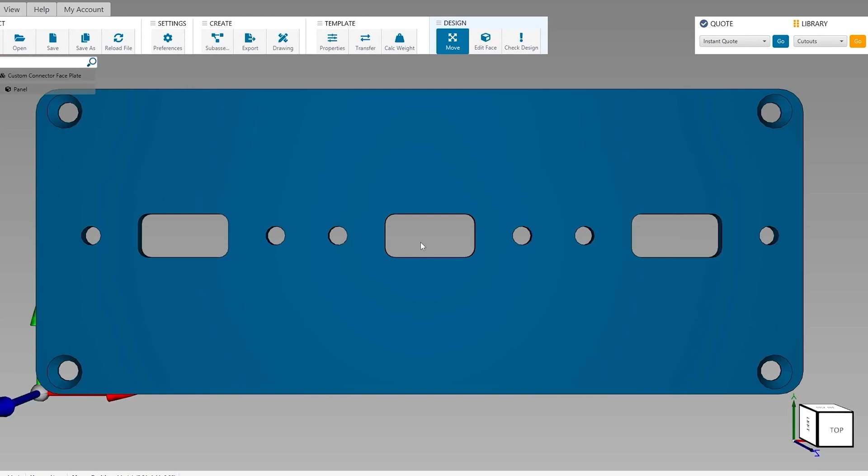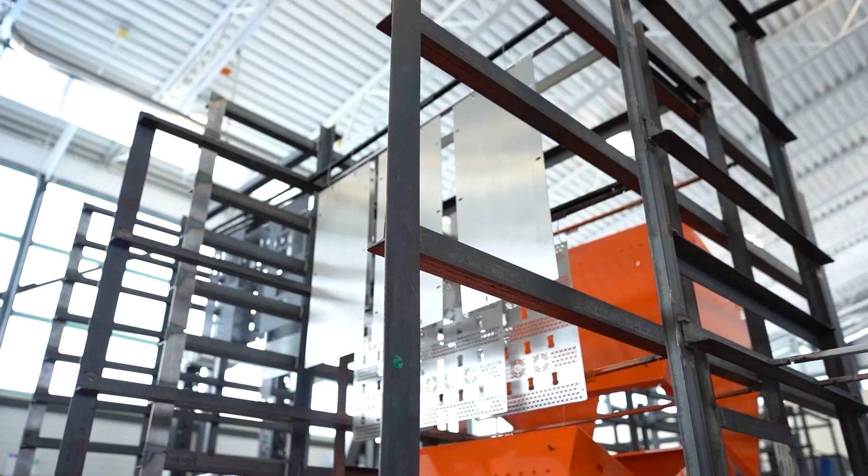That's why we've created professional design software that's directly integrated with our fast custom manufacturing. Protocase Designer is a simple but powerful CAD design software that's seamlessly integrated with our revolutionary mass custom manufacturing process, eliminating design latencies and making sure that we still build your custom parts and enclosures in a lightning fast 2 to 3 days.

Now with Protocase Designer Enterprise, we've taken all of the things that you love about Protocase Designer and added in some exclusive features. One of those features being the ability to create dimension drawings directly inside the software.

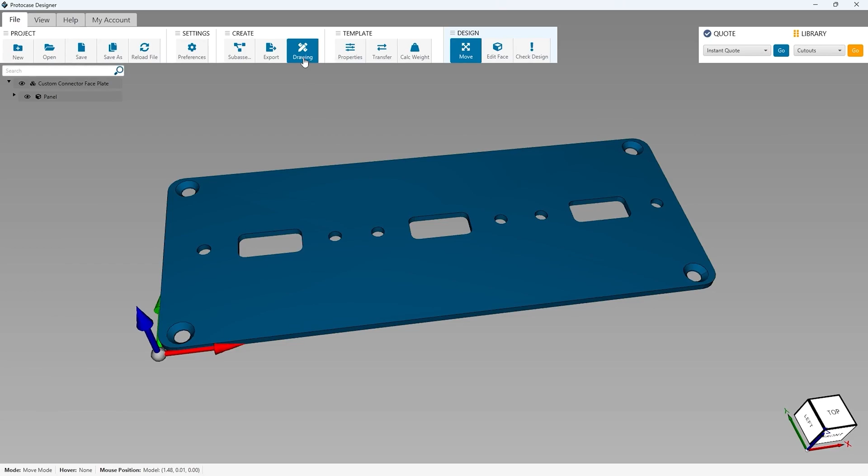Our all-new Dimension Drawings feature was heavily requested by not only our customers, but our own internal engineering and design services team. This feature allows you to verify your models with precise accuracy—keyword being precise.

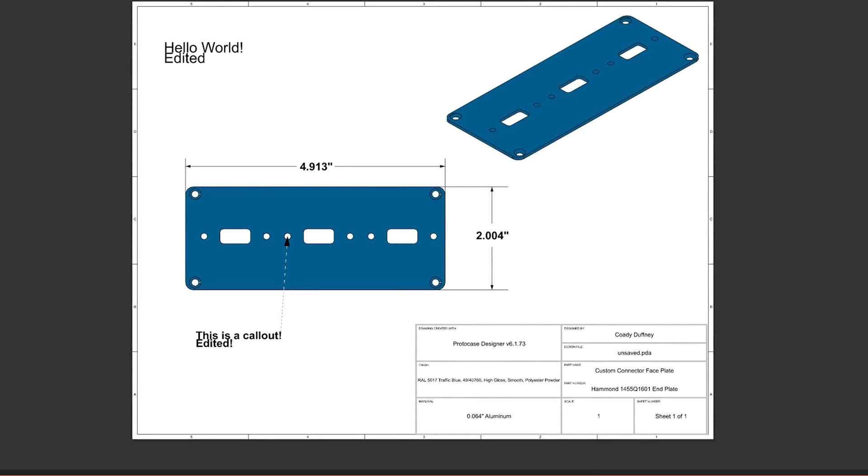These drawings provide information about the size, shape, and features of the design, such as lengths, widths, diameters, angles, tolerances, and more. You can even add editable text notes to meet your organization's specific requirements and create fully dimensioned PDF drawings of your design. Now it's all about working smarter while still meeting those critical design deadlines.

So let's take a look at this feature by first opening Protocase Designer. To get started, I'm just going to open up a basic template that I have saved in my shared library.

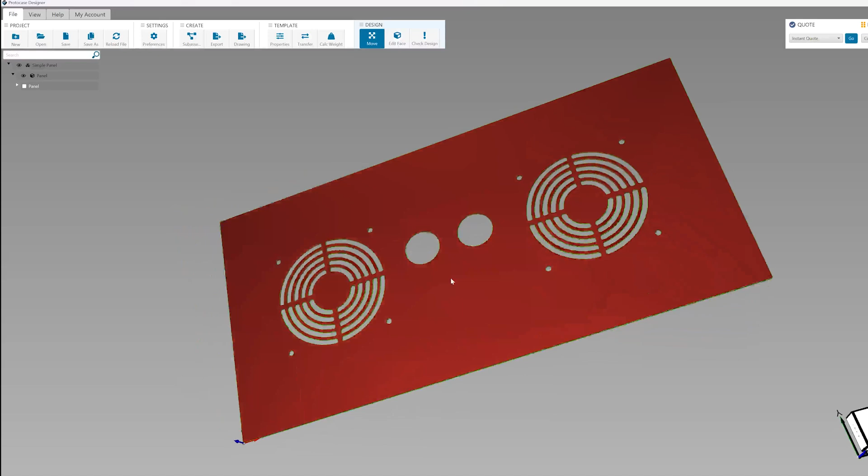So to start creating some dimension drawings for this panel, we can go ahead and select the drawing button at the top menu. This is going to open up the new Dimension Drawings editor.

By default, this is going to create a full page for your assembly with all of the default views, and then it's going to create a page for each part. But in this case, we just have a simple panel, so this is the only part.

Now because this is a panel, let's say I don't want these views here. I can hold Shift and left click to select them all and then just right click and delete. Now we are just left with the top and isometric views, which is a much more clean look.

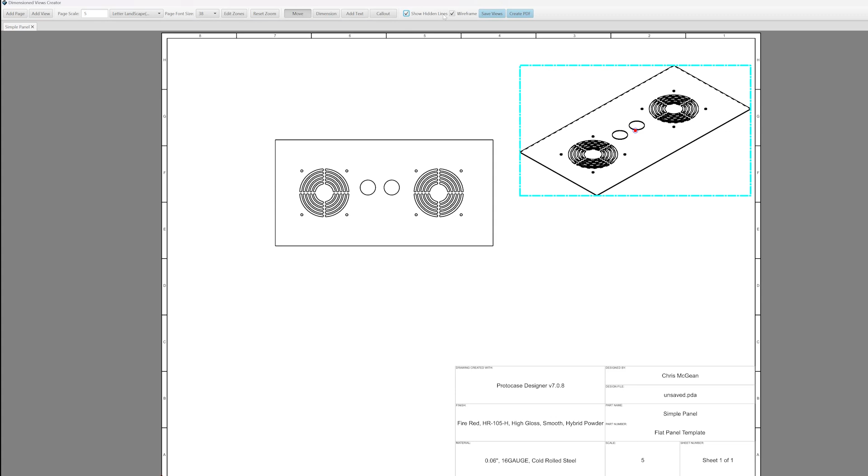We can also highlight these and toggle between hidden lines showing, hidden lines not showing, or a wireframe or a filled view. So let's go ahead with the filled view, and now that we only have these two views, I'm going to go ahead and change the page scale so it fits onto the page a little bit better.

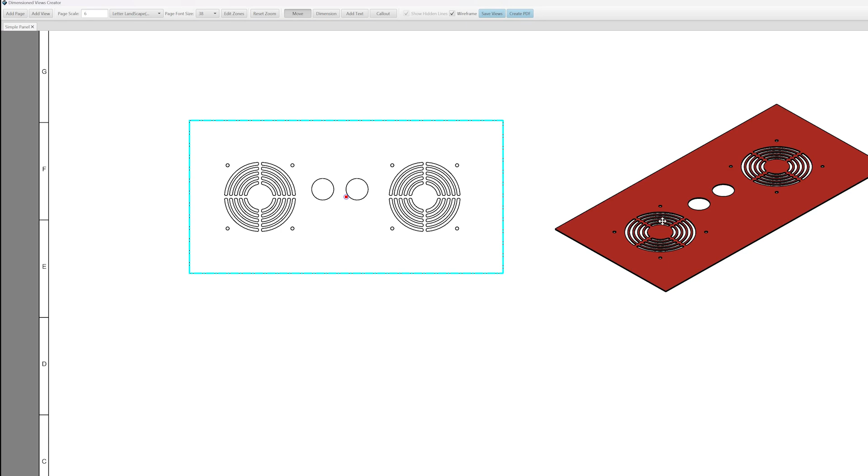So now that we have the views that we want to dimension, let's go ahead and cover the actual modes of this editor. Just like the default 2D editor in Protocase Designer, you have your Move mode. This is just used for moving objects around the page.

Next to that, we have the actual Dimension mode. This is where you'll create your actual dimensions. So once we're in this mode, when we mouse over objects, you'll see these little snap points. This is what we can dimension to.

So if I left click on the snap point, you can see that it starts to draw. And then if I select this snap point over here, it's going to snap in and give me my dimension line. So we'll create one for the width, and then we're going to create one for the height as well.

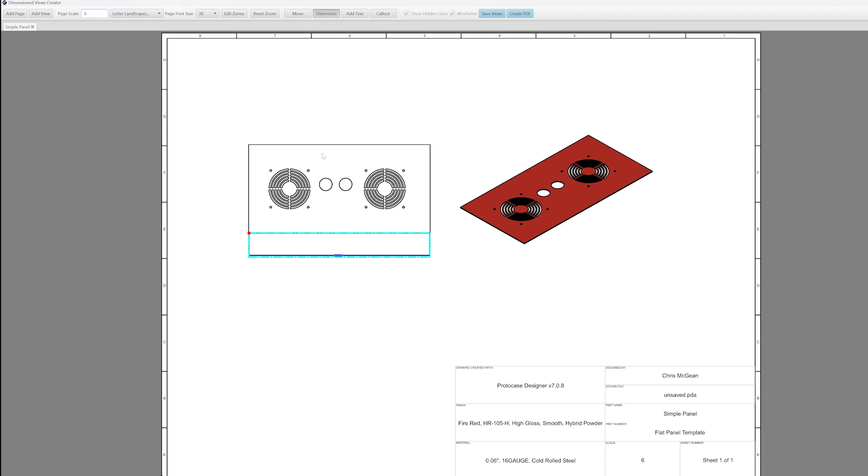Next to the dimension mode, we have the ability to add text to the page. This is just a free-form text note that you can add to your drawing. Once you're in this mode, if you left click on the page and begin typing, there's your text.

The final mode next to text is called Callout. This is similar to text, except it will draw a leader arrow from where you select, and you get snap points similar to the dimension lines.

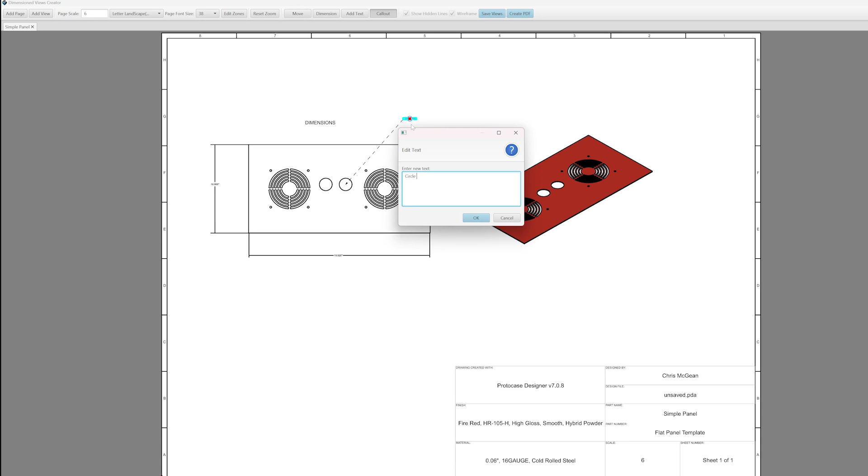Let's say we want to call out this circle cutout. We select that, move the mouse outside, left click again, and it prompts you to enter some text. At any point after we have text placed on the page, we can double click it and it'll open a window where we can edit it. The same applies for callouts as well.

Starting with the top left, we have the option to add a new page. When we select this, we get the option for a full new assembly view, or one for each part as well.

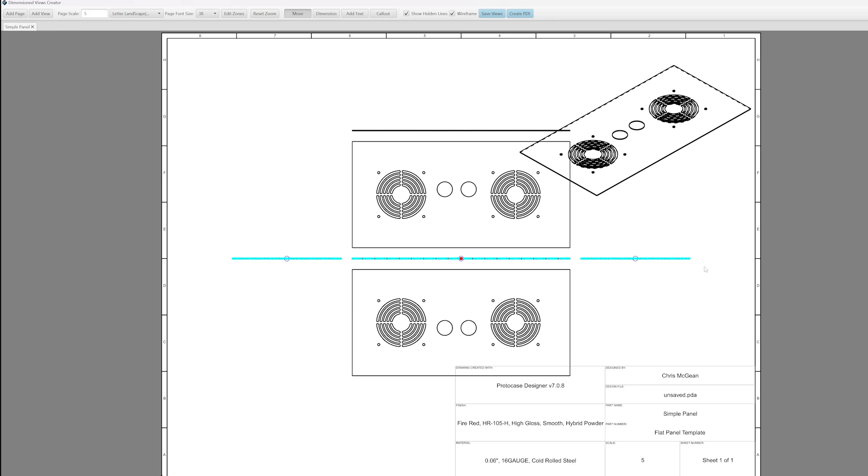I'll select full assembly, and let's say I accidentally deleted some views, because it can happen. We have the option to add them back in with this Add View button next to Add Page. This prompts you to select which views you want, so we can select isometric and click OK.

We've already covered page scale, but next to it we have all the options for different page sizing. These are just typical PDF printer page sizes, and if we no longer need this page, we can delete pages just by closing the tab.

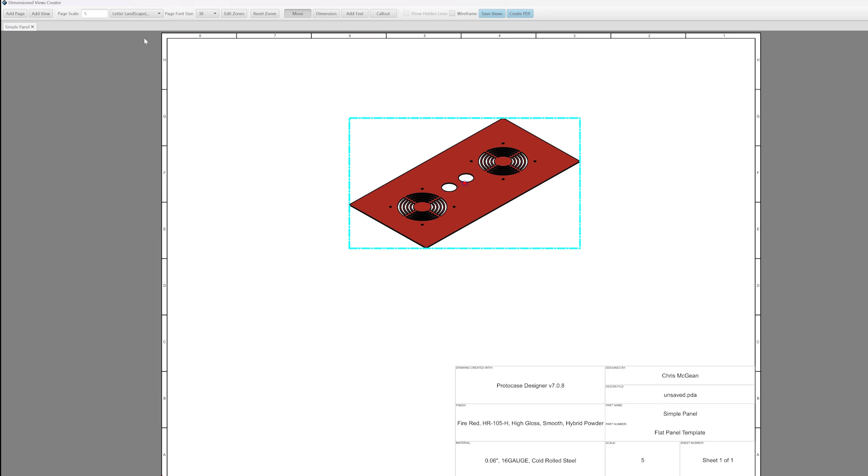We also have an Edit Zones button. This allows you to configure page zones around the margin. If I select this, you can change the number of horizontal and vertical zones, or if you didn't want this at all, you can set it to 0 and that hides it entirely.

Moving on from Edit Zones, we have the option to save views. When we click Save Views, this persists our dimensioned view to our PDA file. So if I save and then exit, the next time I select drawing, it will just load up my previously saved drawings.

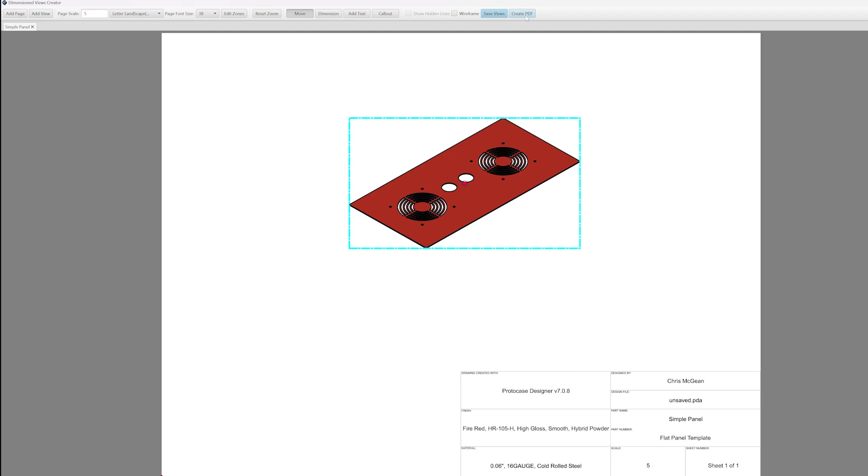And finally, we have the option to create a PDF. This generates a PDF of my dimension drawings, and then we can check that out by opening it. And there you have it.

That pretty much covers everything for the new Dimension Drawings feature that comes with a Protocase Designer Enterprise subscription. To sum up the importance of this feature, using Dimension Drawings ensures that every part of your design created inside Protocase Designer is precisely accurate, as we're going to be making it to the exact specifications.

It should also serve as the universal language between your design requirements and our engineering and design services team, which significantly reduces errors and any inconsistencies going from design to manufacturing.